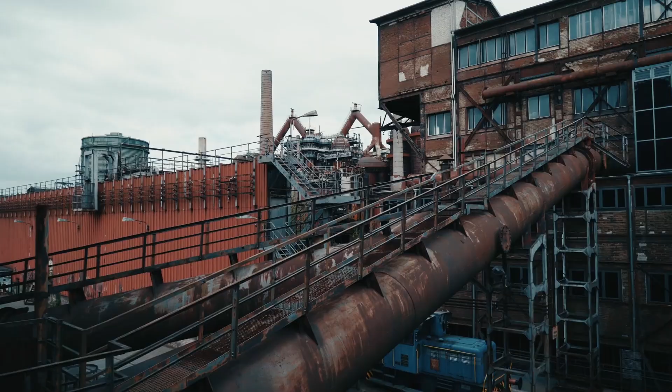A joint research team from Canada and South Korea has developed an innovative, high-performance material that's set to revolutionize lightweight engineering. Imagine a substance as strong as carbon steel, yet as lightweight as styrofoam. Yes, you heard that right.

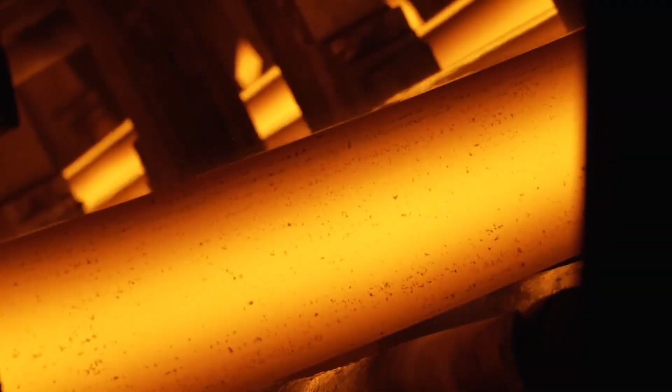This groundbreaking material combines the best of both worlds: unparalleled strength and minimal weight, which could drastically reduce fuel consumption in vehicles, particularly airplanes. To put this into perspective, every kilogram saved on an aircraft could reduce fuel consumption by up to 80 liters per year. Modern passenger aircraft can weigh hundreds of tons, so shaving off even a fraction of that weight with lighter components can result in substantial savings and significantly reduced carbon emissions.

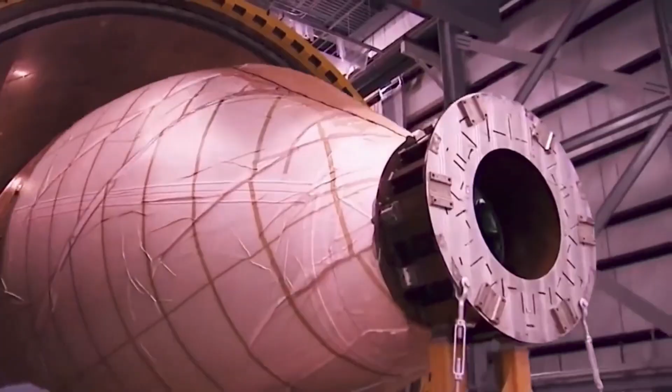But what exactly is this new material? How does it compare to traditional alternatives? And just how far can its potential reach? Let's unpack all of that.

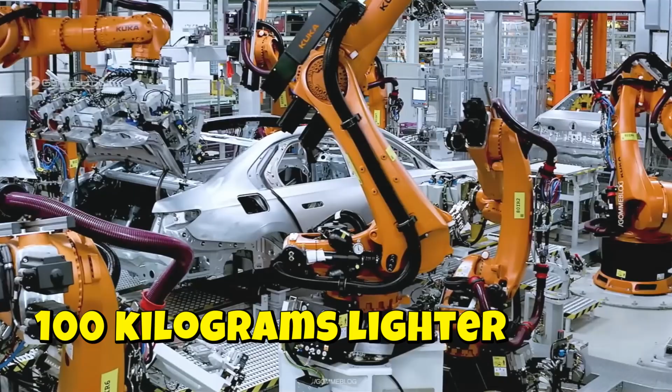Reducing weight in engineering isn't just about performance. It's about efficiency and sustainability. When a car is made 100 kilograms lighter, it typically consumes about 0.5 liters less fuel per 100 kilometers.

At first glance, that might seem insignificant. But across Germany, where all vehicles combined clock more than 582 billion kilometers annually, those seemingly small savings add up. If every car were 100 kilograms lighter, it would translate to a national fuel saving of over 2.9 billion liters each year.

In aviation, the stakes are even higher. An Airbus A320, for example, could save nearly 10,000 liters of fuel annually for every 100 kilograms reduced. This is why lightweight construction is not just a design trend, but a critical goal in modern engineering.

Enter the new ultralight material developed through the collaboration between Canadian and South Korean scientists. At its core, the material belongs to a class known as nanoarchitectured materials. These substances are structured using powerful geometric forms, like triangles, which are known for their strength in bridge construction, but applied at the nanoscale. The guiding principle here is simple but powerful.

The smaller the structure, the stronger it becomes. This concept isn't new. Scientists have understood for over 60 years that shrinking the size of metal structures increases their strength. Nanoarchitectured materials exploit this concept to the fullest. They offer exceptional strength-to-weight and stiffness-to-weight ratios, achieving feats that bulk materials simply can't.

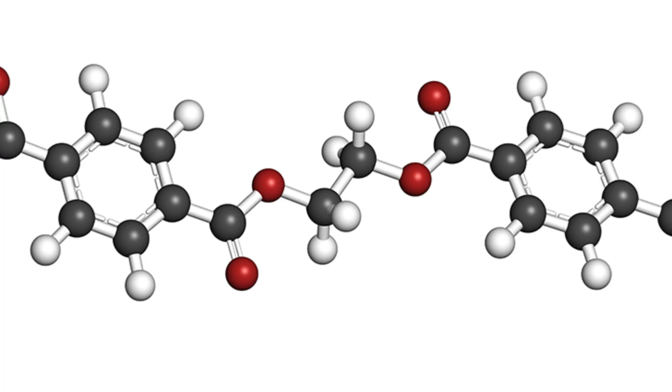The Canadian and South Korean researchers set out to combine two key properties: extremely low material density and high structural strength, into a single material. Their base component was a polymer, which is essentially a compound made of repeating molecular units. But the magic lies in how they transformed this simple polymer into something extraordinary.

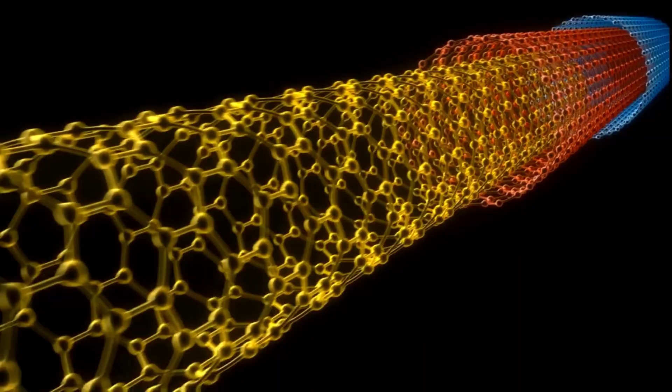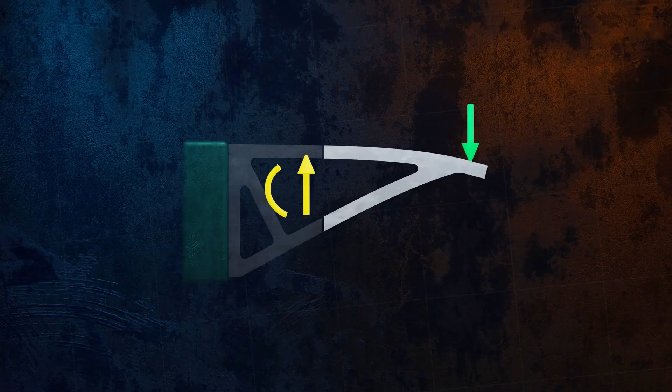They used a two-pronged approach, combining the finite element method, FEM, and Bayesian optimization. The FEM is a computational technique used to simulate how materials react under various physical influences like pressure, heat, and vibration. It breaks down complex models into smaller elements, making calculations more manageable. These individual elements are then analyzed and reassembled into a comprehensive simulation of the material.

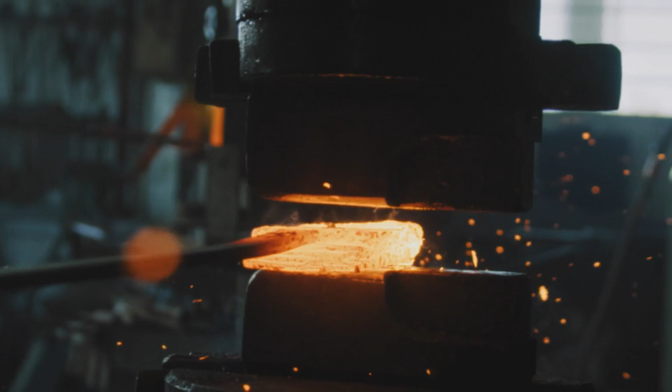Using FEM, engineers can simulate the behavior of materials under real-world conditions. For example, how a part will react during transport, assembly, or even under extreme stress. This allows for not only optimizing the performance, but also reducing development time and costs. However, FEM typically focuses on the macro scale.

To fine-tune the design further, the researchers integrated Bayesian optimization, a probabilistic method that intelligently searches for the best parameters to improve a model. Bayesian optimization works by predicting the performance of unknown data points based on existing ones, using what's called a Gaussian process. This helps identify which configurations are likely to yield better results.

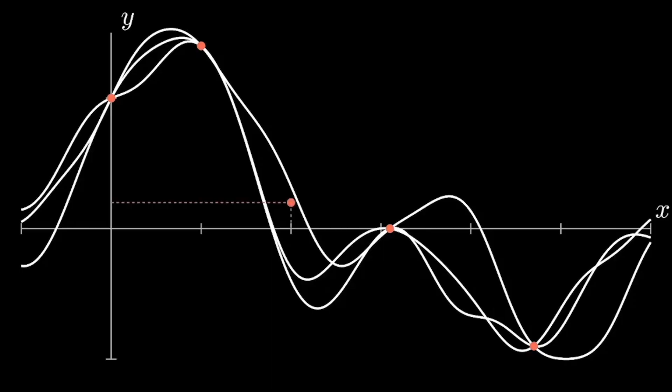A key feature of this approach is the acquisition function, which evaluates where the model should look next, essentially guiding the optimization process by selecting the most promising data points in a vast parameter space.

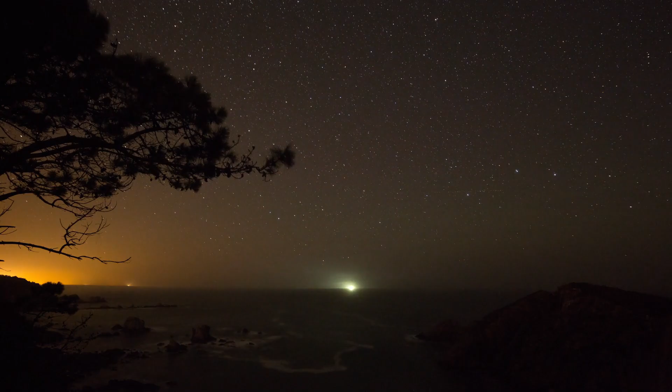Think of it like mapping out a galaxy. Each star represents a possible configuration. Some stars improve your material model, others don't. The acquisition function helps you find the brightest stars, those most likely to lead to breakthroughs.

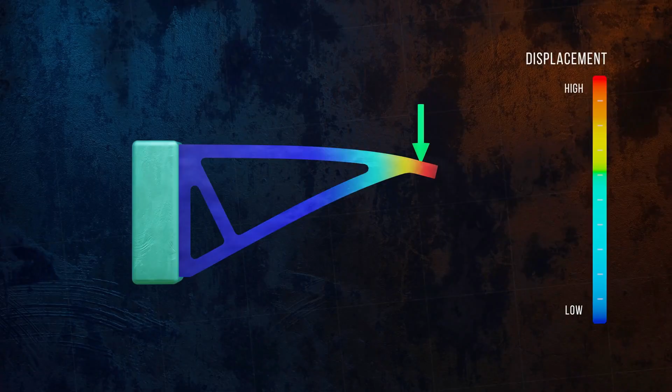After identifying a promising data point, the researchers updated their model and ran it through the FEM again. This cycle repeated over and over until they had integrated 100 new data points into their model, each one improving the material's predicted properties. So, what did all of this lead to?

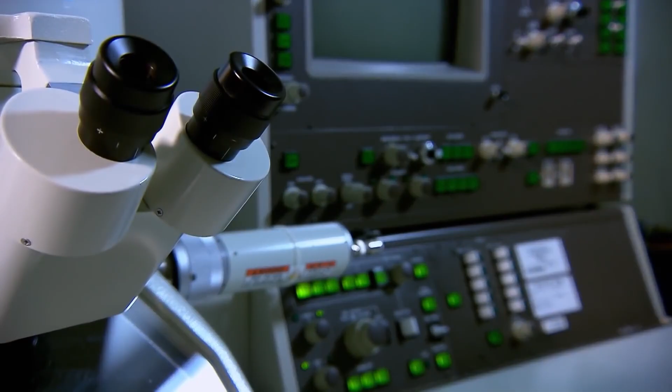The study focused on a particular type of nanoarchitectured carbon material, pyrolyzed carbon nanolattices. Pyrolysis involves heating materials to very high temperatures in an oxygen-free environment, effectively transforming polymers into carbon while maintaining a net-like structure at the nanoscale. This structure gives the material its remarkable strength and lightness.

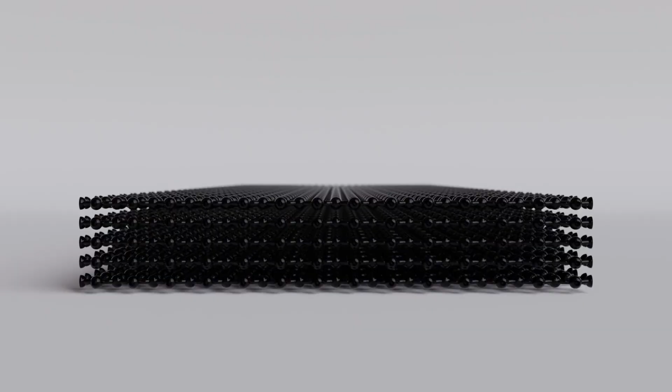Thanks to the fusion of FEM and Bayesian optimization, the team significantly improved the mechanical properties of these nanolattices. They boosted the material's stiffness by an impressive 68% and its strength by a whopping 118%.

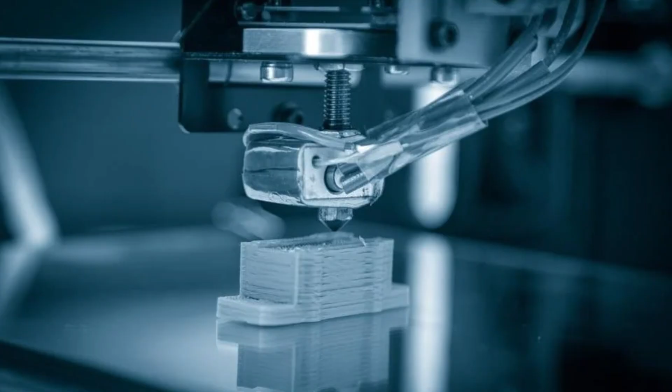But theory alone isn't enough. These findings had to be validated in the real world. To do this, the researchers employed a technique known as two-photon polymerization. A precisely focused laser beam hardens a light-sensitive polymer at specific points, forming a three-dimensional nanolattice. They then applied pyrolysis, converting the polymer into a carbon-based structure.

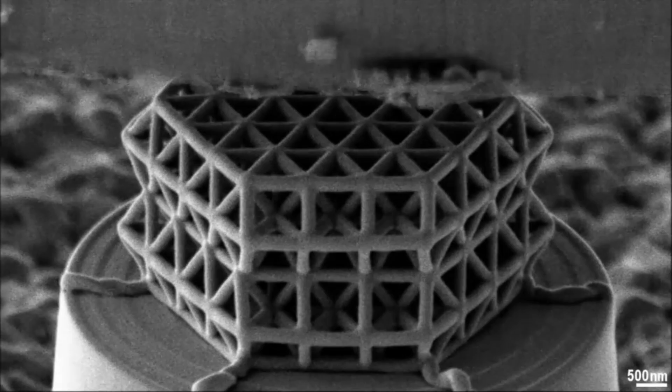The final product? A carbon nanolattice with a compressive strength between 180 and 360 megapascals, comparable to carbon steel, and a density between 125 and 215 kilograms per cubic meter.

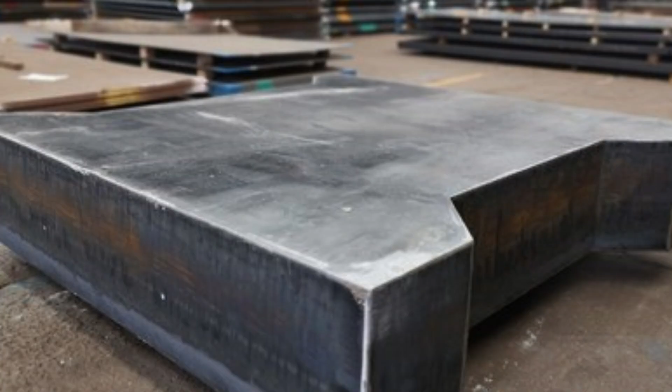You might pause here and think, isn't 125 kilograms per cubic meter a bit heavy for something being compared to styrofoam? It's important to note that this figure aligns more with specialized types of styrofoam used in protective gear like helmets, which typically range from 90 to 100 kilograms per cubic meter. In contrast, construction-grade styrofoam is much lighter, around 15 kilograms per cubic meter.

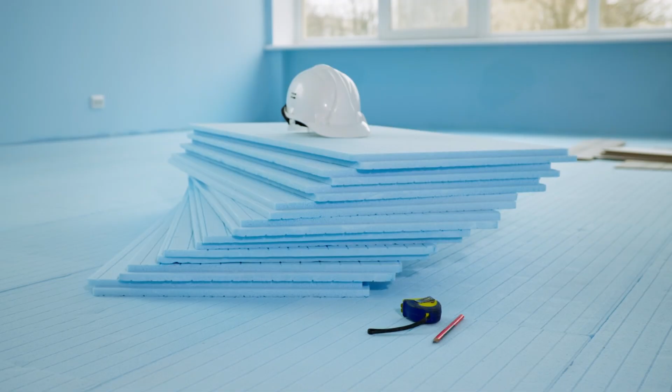The comparison might be a bit playful, but it's powerful. Carbon steel has a density of about 8,000 kilograms per cubic meter, so achieving the same strength at 64 times less density is genuinely astonishing.

But as with all cutting-edge innovations, there are challenges.

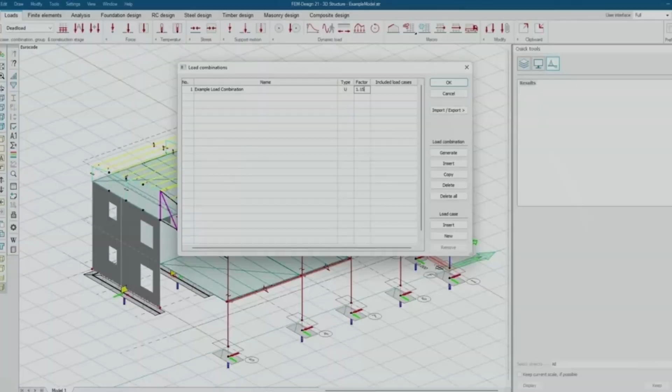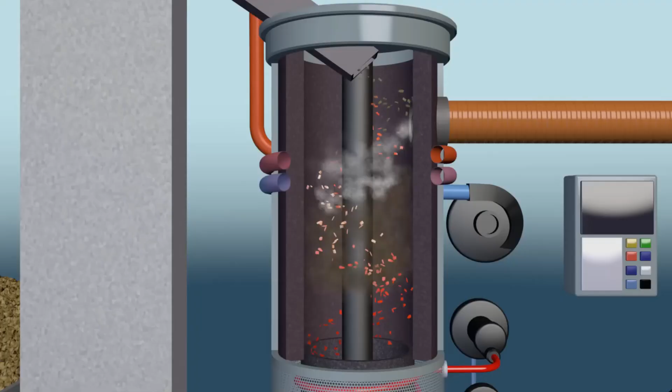While FEM can model many physical scenarios, it struggles with size-dependent effects, especially at the nanoscale. This means some material behaviors are still difficult to predict accurately, but the most significant challenge lies in scalability. Producing these nanostructures is time-intensive and not yet suited for mass production. In particular, the pyrolysis step needs further refinement to make it more efficient and viable for industrial applications. Another issue is homogeneity. Ensuring consistent material quality across large volumes is still tricky.

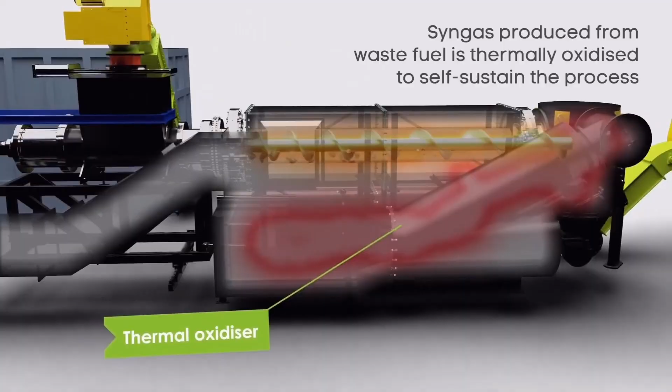And yes, the comparison to helmet-grade styrofoam might be stretching things a bit, but it's effective in helping people visualize just how light this material is.

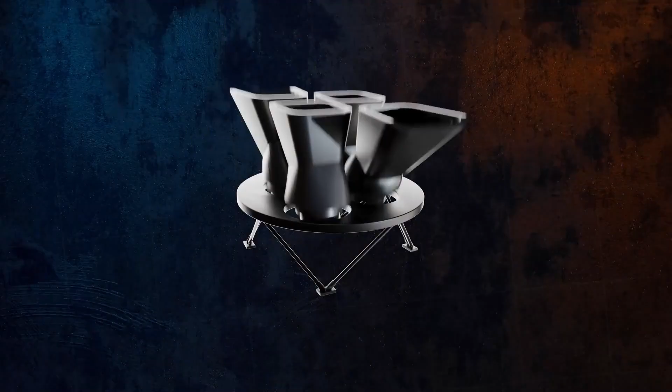All in all, though, this development is exciting. It shows how merging well-established scientific techniques can open up entirely new possibilities. This approach is still relatively young, which means there's room for significant improvement and innovation, especially as AI and machine learning continue to evolve. We might uncover entirely new properties and applications that we haven't even imagined yet.

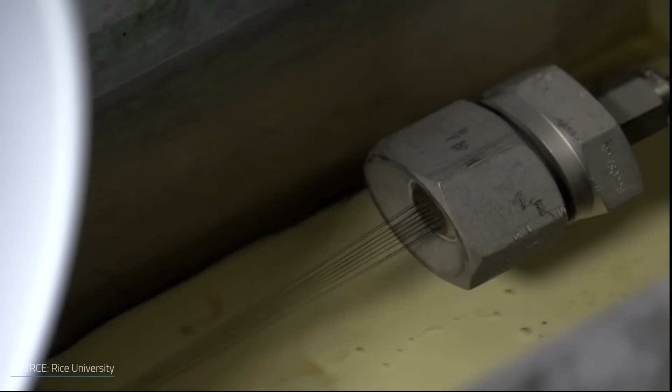So what does this mean for us? Potentially, it could lead to a new generation of ultralight, ultra-strong components for planes, cars, and even spacecraft. Lighter vehicles mean lower energy consumption, lower emissions, and a more sustainable future. What do you think? Can you imagine how game-changing it would be if airplanes and cars could be made drastically lighter without compromising on safety or durability? The potential here is truly enormous.